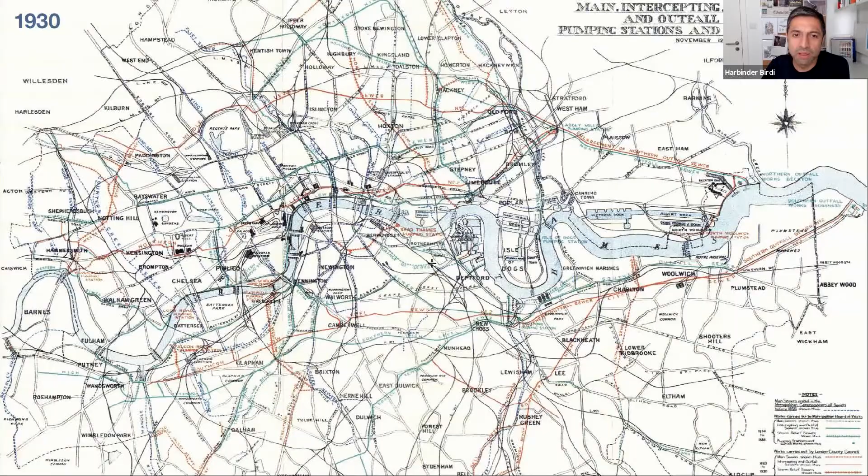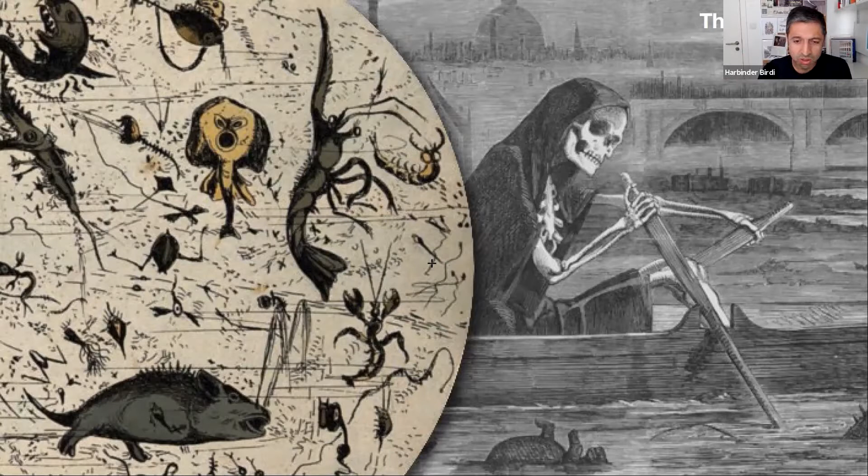But in 1858 there was a big stink, and that's when the River Thames was so polluted because all the sewage was pouring into there that the ministers in the House of Parliament, when they'd open their windows, the stench was so bad that they actually commissioned Bazalgette to undertake the project.

This is Bazalgette, on one of his sites, and he designed the network, which originally had a population of I think 1 million, and he designed it for a population of 2 million, thinking that London's going to expand. The challenge we've got at the moment is London has a population of 8 million, but we're still using a system that is designed for 2 million.

And he did develop a series of profiles of tunnel sections that aided the flow of water - that was the first of its kind. And what he did was that he integrated things like the underground with utilities as well as sewage.

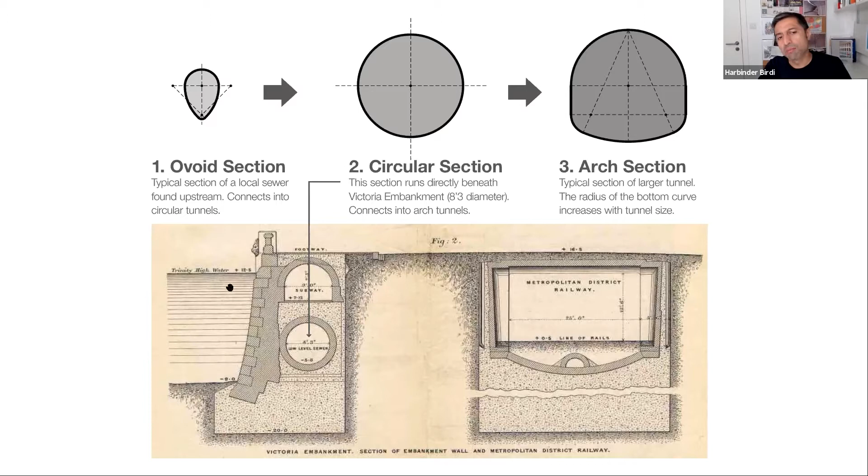And then he reclaimed huge swathes of land from the River Thames and created new walkways - so this is what you see, the embankment. That was quite a heroic project, built over 150 odd years ago.

And so there's a huge amount of sewage in there within the Thames, and the aspiration is basically to find a new system. So the solution is this. I mean, currently at the moment, what you have is surface water, surface, foul, all combined into a sewer system.

So this is like Bazalgette's sewer system. What we're doing now is that we're creating, when this overspills, a new sewer, which is a series of shafts and tunnels which actually take the sewage away. So there'll only be extreme conditions, maybe once or twice a year, when there's extreme rain, that the water will overspill into the River Thames.

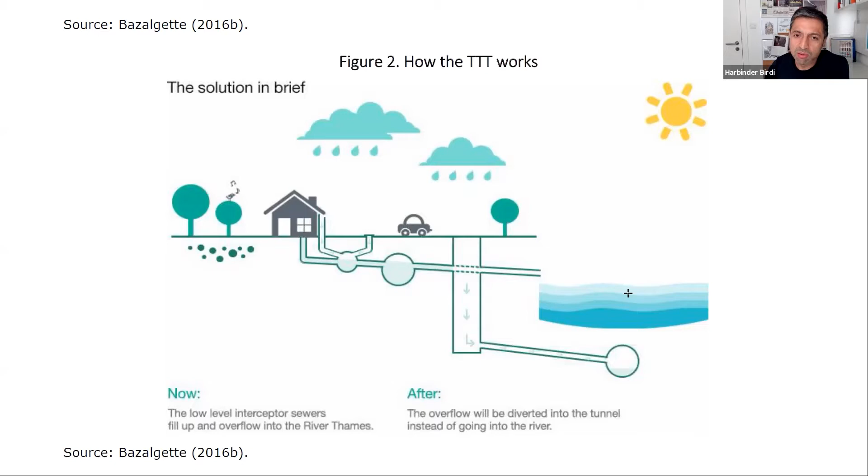So what we're hoping is that the River Thames will become a lot cleaner. And at the moment, it's fair to say that the project is being promoted very much as a big civil engineering project. This project is split into three sections: you have the west, the central, and the east, and we are the architects for the central section.

You can sort of see the mechanics of how it works. I live in West London, so here what we've got is like a 30-meter shaft, and all the existing sewage network, as well as any other surface water, is connected into the new Thames Tideway, and then it comes all the way down to East London, where it's pumped out and treated.

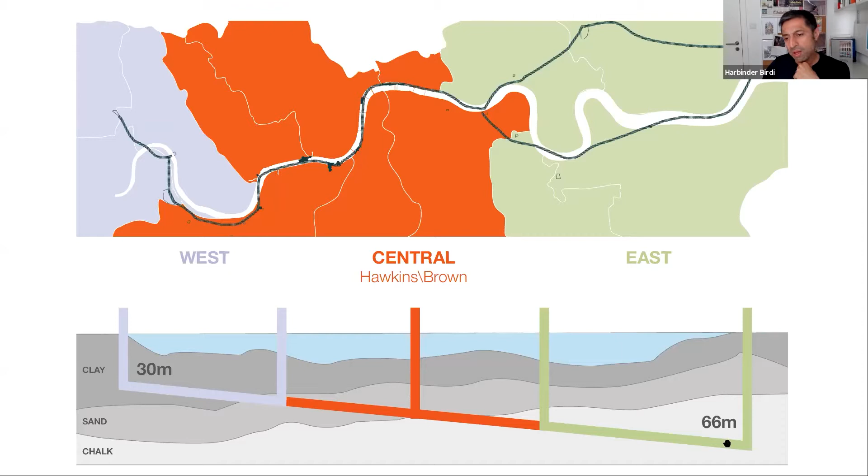And these are some of the images of the work sites. This is actually in Acton in West London, so this is the first shaft. So this is surface water, foul water from all of West London, which then gets poured into this 30-meter diameter shaft. And it's tucked away behind this hoarding.

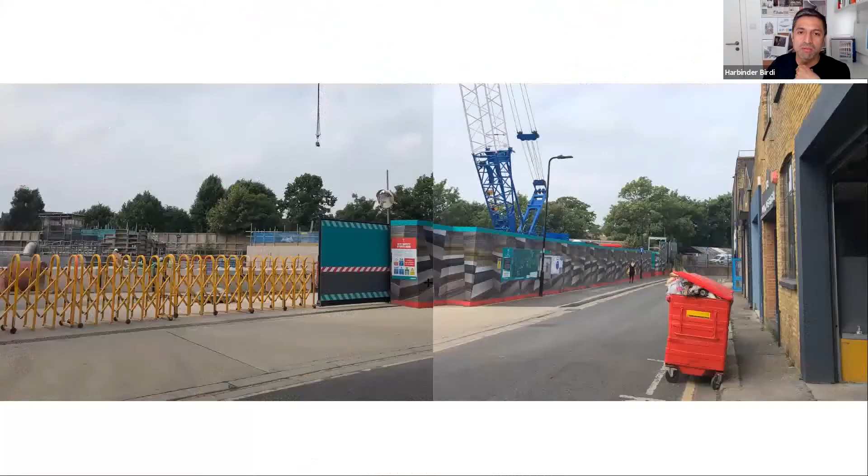So what you'll see along the River Thames is lots of hoarding and work sites that burrow into the ground, and then you've got a big TBM chugging away, creating a 7-meter diameter tunnel. But it's been a great project, one to engage lots of young apprentices, and particularly get more women into the engineering profession, which there's a real shortage of, but also for people to engage with what the river has to offer.

And so for us, we were commissioned - there was a concept design that was developed by Tideway and their team, and what we were asked to do is develop those designs, take them to the local authority as well as present them to CABE, and then develop the details for construction.

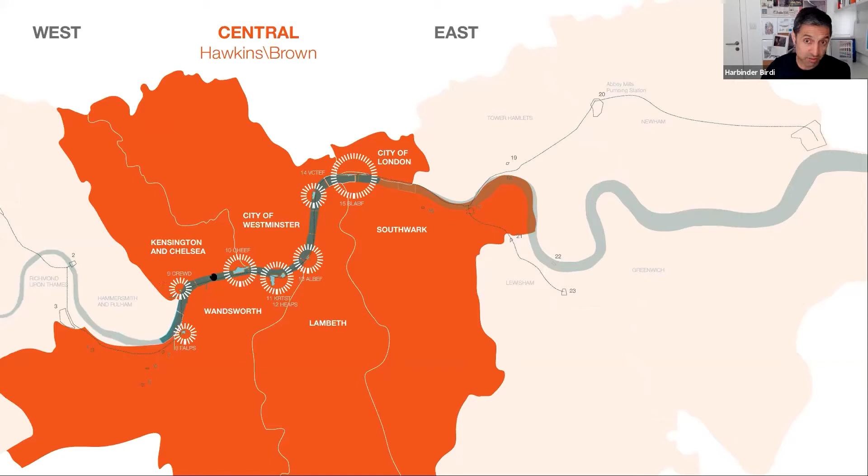So what we have is 5 different London boroughs, but we have like 7 different sites within there, 5 of which are actually on the River Thames. But on projects like this, what you're having to do is engage with a whole raft of stakeholders - so you have the City of London, the Port of London Authority, etc. It's a real combined collaborative effort where you need to get all parties on board.

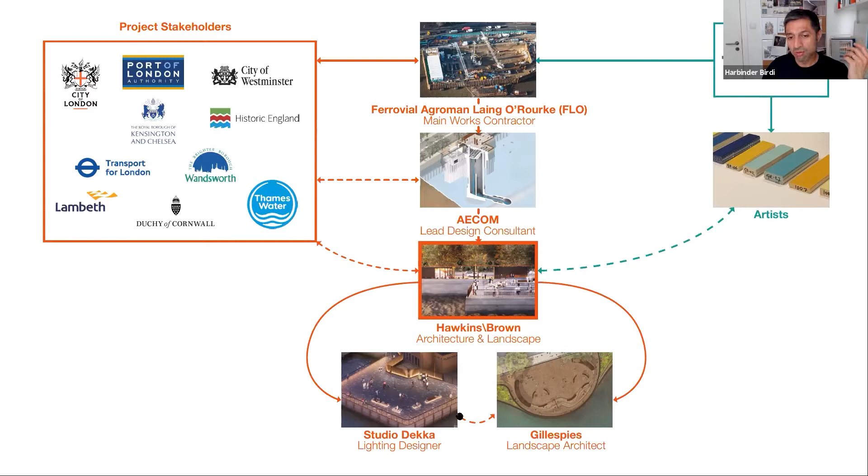For us, the contractor is Ferrovial Laing O'Rourke, AECOM are the lead consultant, we're the architect, and then we have sub-consultants Studio Dekka for the lighting and Gillespies. And then we also work with artists, which I'll mention later. But just the sheer amount of public realm that we're creating in the River Thames is almost the size of Trafalgar Square just on the central section sites.

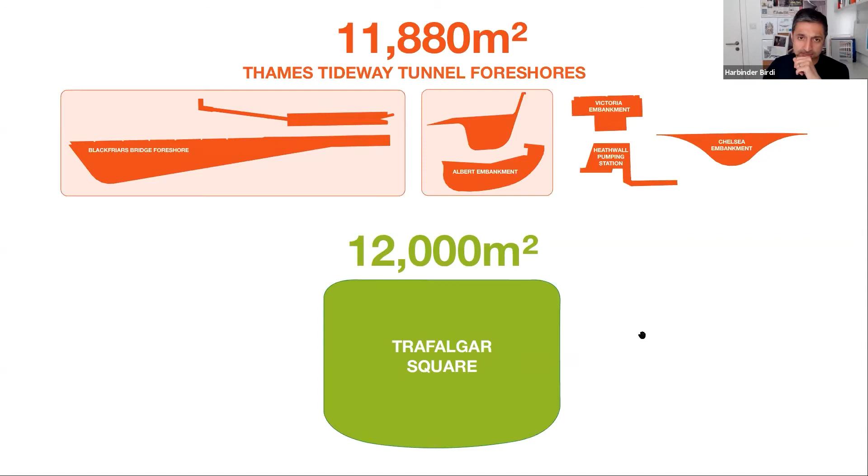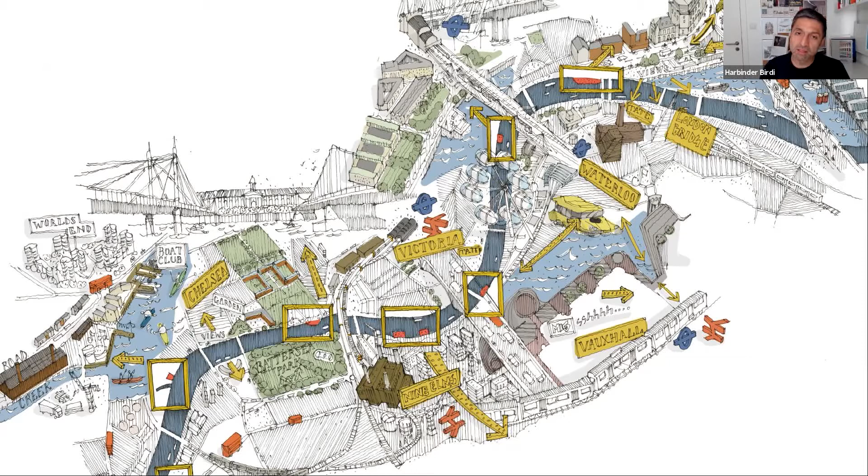So the first thing that we did is we actually looked - I mean, London's considered like a patchwork of villages, all with their own identity and history. One of the things that Tideway asked us to do was look at the history of the sites, and maybe the public realm we're designing could reflect or tell a story about that history. So we started looking at the various places, and the first one is Victoria Embankment.

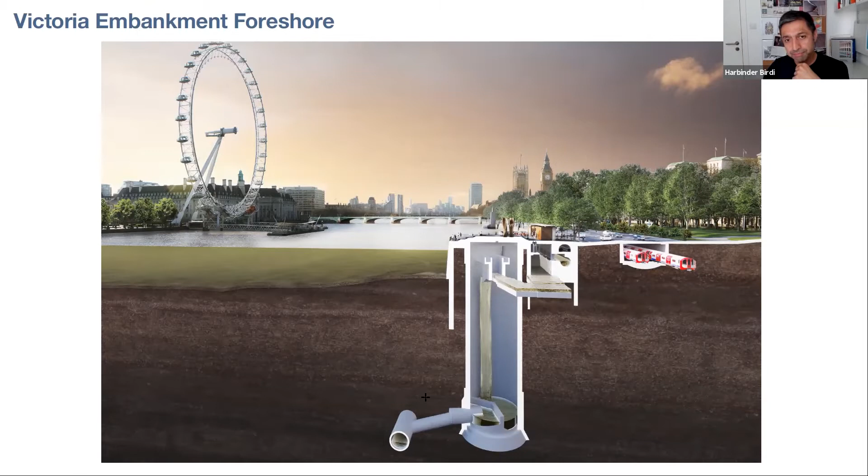Essentially, the project is a piece of machinery that needs to be accessed at all times. So for us as designers, the real challenge was how do you create a fantastic public realm that is open to the public at all times, but at the same time needs to be maintained. So it's very much about civil engineering, mechanical engineering, architecture, and landscape all working together.

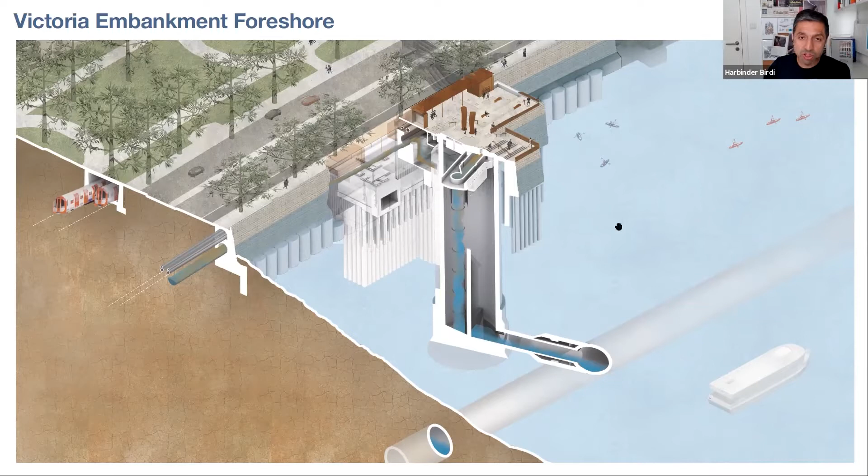You never see the machinery underneath. This is a close-up, because obviously what they can't do is allow for the mechanics below this to fail. So the priority is very much to be able to service that area.

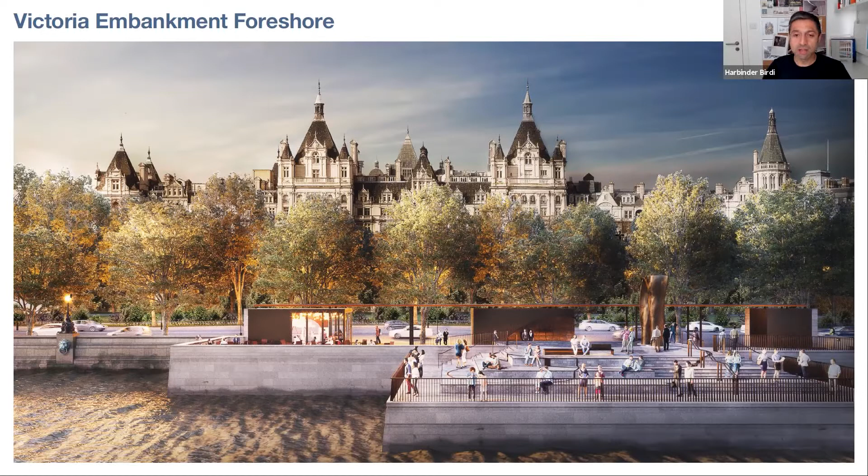This is a view of the embankment public realm from the south bank looking north. What we've done there is actually create a series of pavilions. One's a cafe, on the left with a canopy, and then you have a series of granite terraces that take you down to the River Thames.

We were very keen to tell the story of Bazalgette, because this was essentially where the Bazalgette monuments were. What we really wanted to do was tell a story of the profiles and the sections and the size of the infrastructure that Bazalgette designed 150 years ago.

So what we did is etch those profiles onto the side of the bronze cladding that will clad some of these kiosks. Behind there are actually operational materials and toilets and cafes and kiosks.

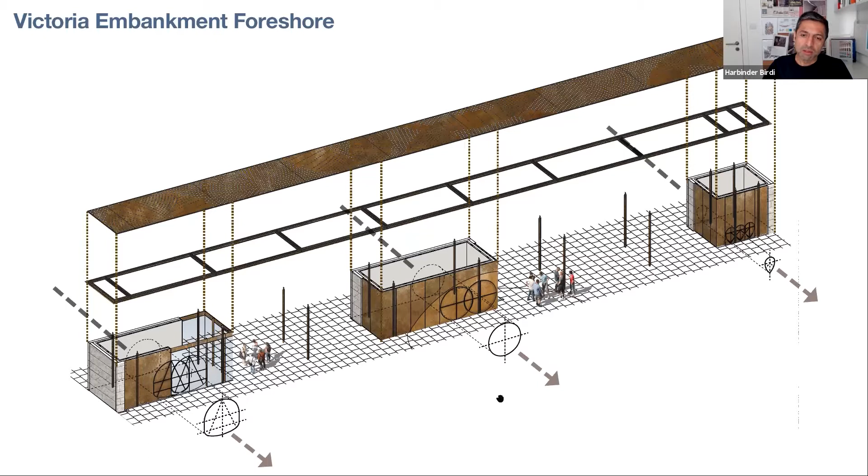Overlaid on that, we wanted to show the scale of the engineering that we are designing now to service London. So that's a 13-meter diameter shaft, bronze inset within the granite, as well as a 7-meter diameter tunnel.

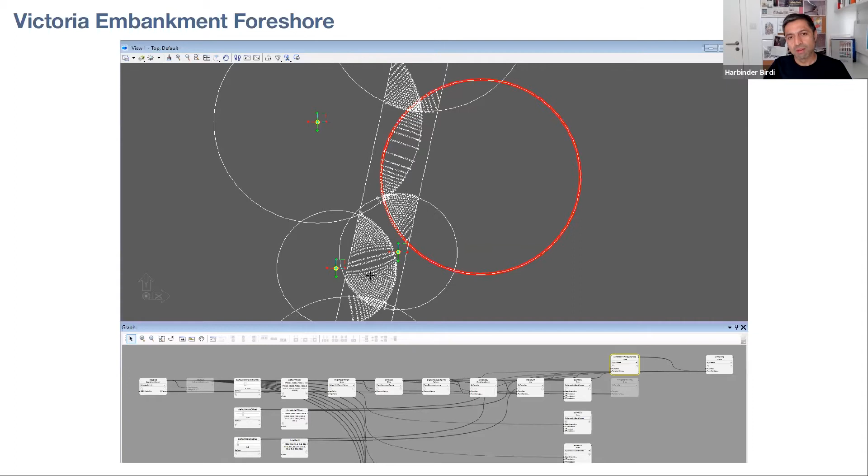Then we actually overlaid some of those geometries onto our canopy and created a frit. So what happens is you've got those different sections creating and animating a canopy, which is then used by the public.

This public realm is free access to all. It's a continuation of the pavement. But you end up having, I suppose, profiles and frits that are set within the landscape that tell you that story in terms of the infrastructure that lies beneath your feet.

These structures here are actually ventilation shafts, and you might see them in London, the Victorian ones. They're vents, and that form is actually the profile of the vortex of that 30-meter shaft. When sewage falls down there, it's designed to allow the sewage to fall in the vortex so that it doesn't land on the concrete and impact it and break it.

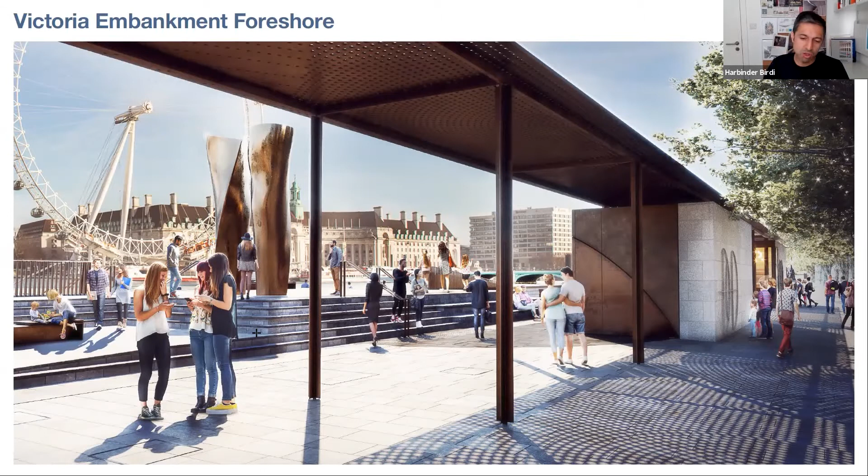And that's the form. Within those chimneys, we have this carbon mesh which absorbs all the foul smells, and they are located on each of the sites.

This is a view from the embankment, and you can see here where we've got the Portland stone and the granite. What we're doing is etching onto there the profiles of Bazalgette sewers that are literally beneath your feet there.

This will be open to the public 24/7. You can imagine, like New Year's Eve, this will be the great vantage point when the fireworks are going off on the Millennium Eye. So very much public realm.

What we really wanted to do with our lighting was make the area towards the street well lit, but as you go to the river, the lighting fades away. So essentially there is no light pollution at the river. We worked very closely with the Illuminated River team, who are illuminating all the bridges on the River Thames.

This is the site, a picture taken about a year and a half ago. You can see the heroic engineering where you've got a very large site, the River Thames. It's double tidal, actually an estuary rather than a river. You're having to create this huge piece of infrastructure surrounded by a real hostile environment.

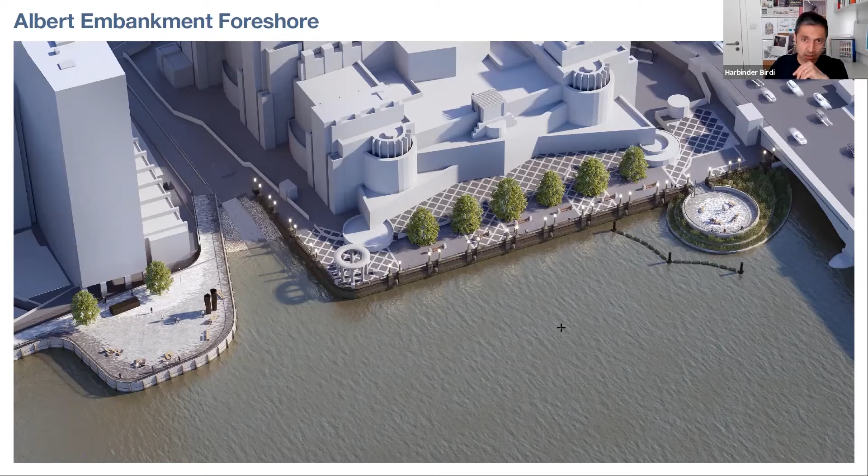This is another site, Albert Embankment Foreshore. That's the MI6 building. What we were doing there was creating two sites, here and here. Underneath these sites is all this infrastructure here.

Sometimes what happens is this is the old River Effra. The River Effra used to be the river that naturally fed into the River Thames. It then became part of Bazalgette's sewage network, and this area here is an overspill.

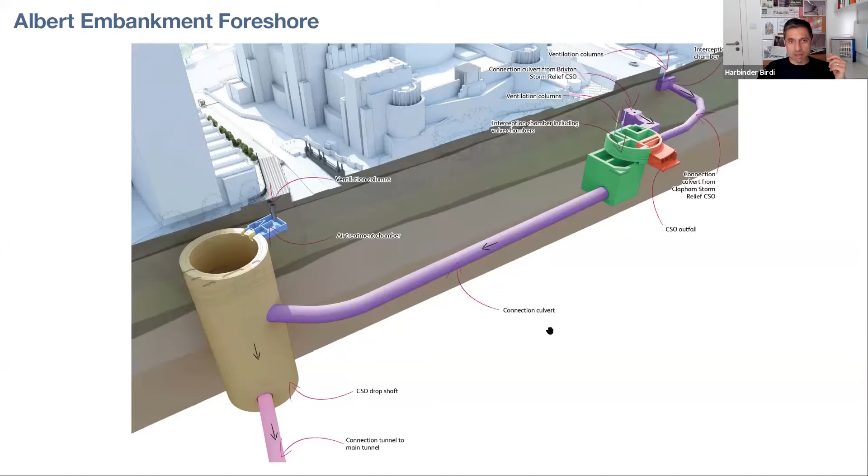So we're connecting the overspill into a series of chambers, which then gets drained away through a culvert into a shaft and into the main tunnel. And this is the River Effra. So this is part of Bazalgette's intervention, and this is a little gate which allows for the overspill into the Thames.

This was the brickwork that the Victorian engineers and bricklayers created. It's still immaculate, still working really, really well. So we're not taking any of this away. None of it is now redundant - it's still working really hard and will be for the next 100 years.

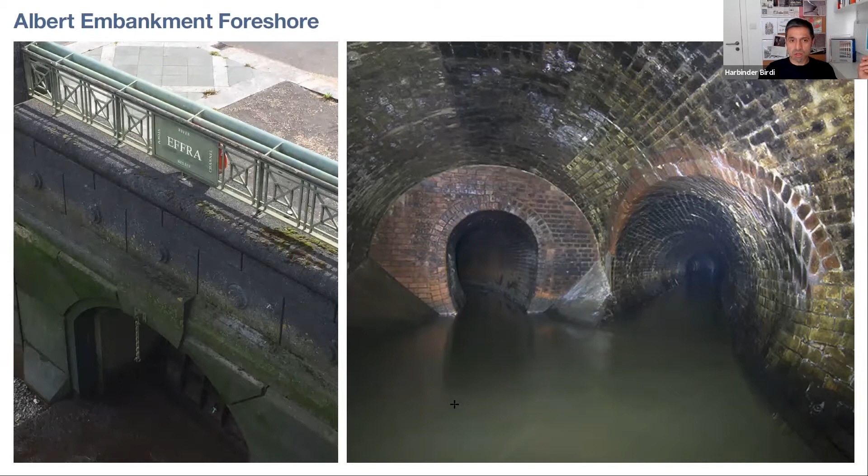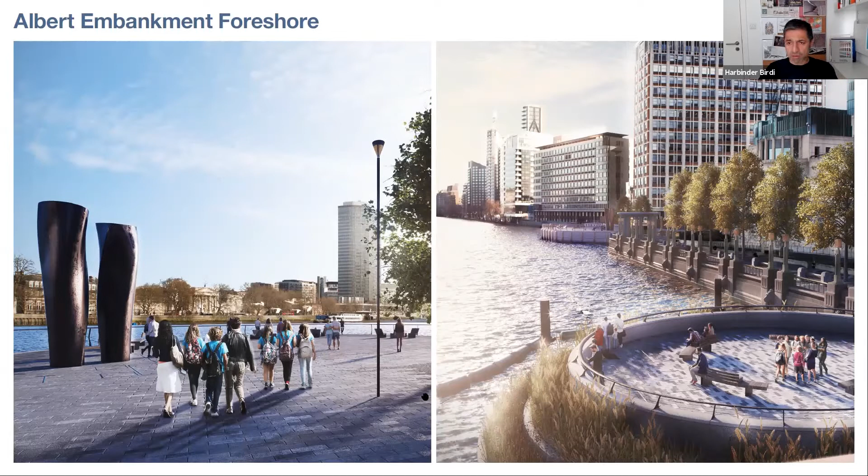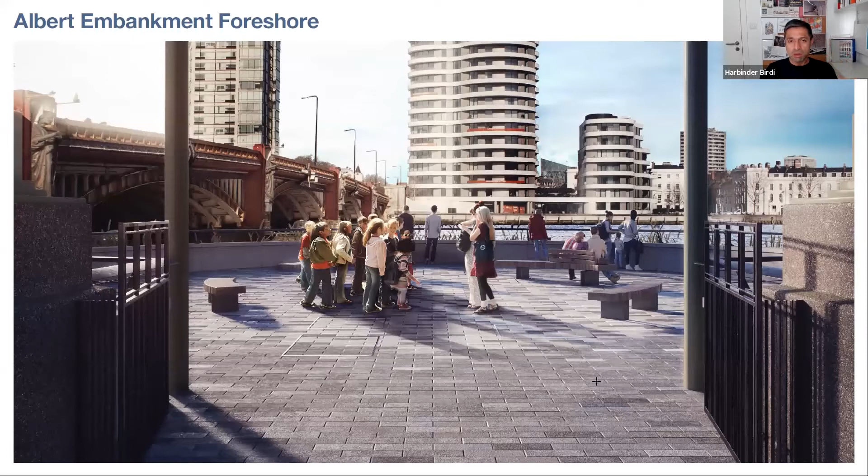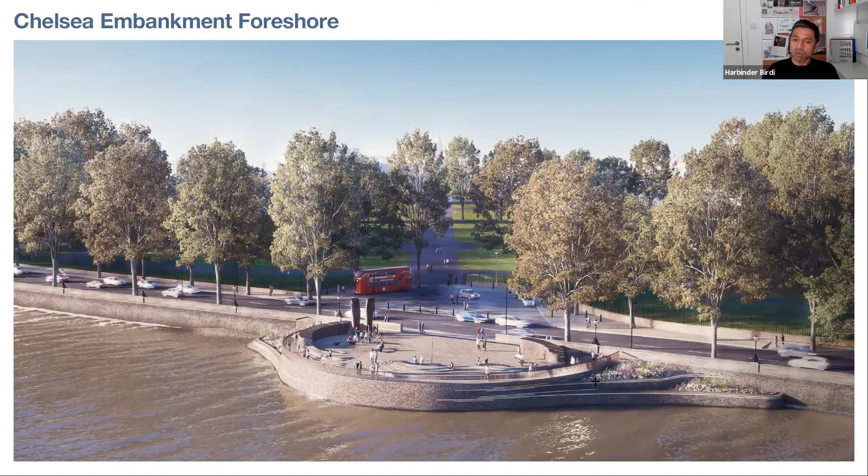Another site was the Chelsea Embankment, where you have the Chelsea Flower Show. There, Bazalgette actually used brick for the wall rather than granite. What we wanted to do was develop a proposal which was almost extracting the brick out into the river, so it would look as though the public realm has been eroded by the river over time.

We worked with a lot of natural contours, but we were very keen to bring in tidal terraces - bringing in vegetation that thrives off the river.

We were also looking at the flood defenses - we were designing this structure up to flood levels of 2065, 2090. So we were mindful of the interventions we were creating, making sure there isn't a breach in terms of anticipated river levels due to global warming.

We worked closely with the landscape architects on the specification of some of these materials. We were very keen to try and get as much greenery in as possible, but the challenge there was you've got a big piece of hard landscape with a lot of kit underneath, so actually putting plants in there is a real challenge.

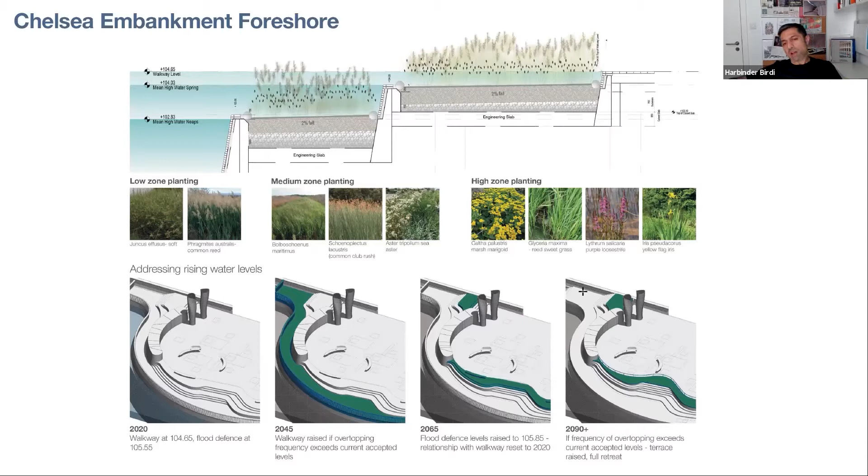What Tideway did do is that wherever they had to remove trees or vegetation from one of the sites, they relocated it elsewhere. So it was effectively offset.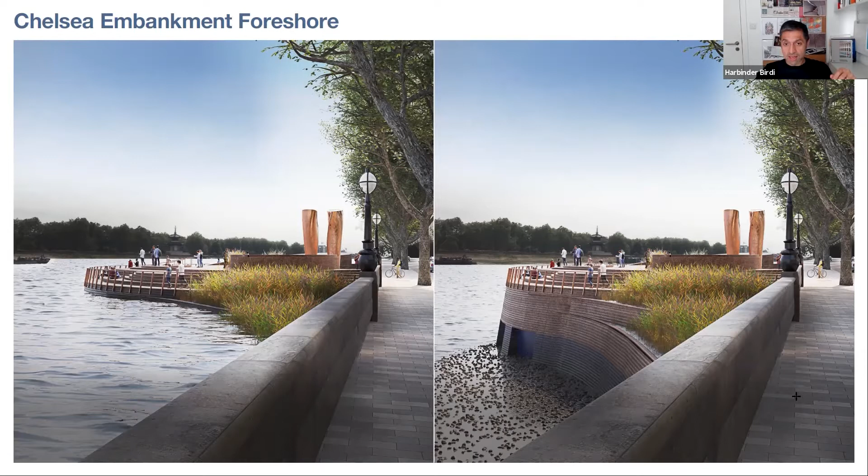You can see here the tidal drop and what that public realm looks like. At one point you are very, very close to the river here, but you always have those great tidal terraces there, which are in full bloom. Those areas just there are actually the gates, should there need to be a discharge into the river.

Very much a team effort. The big challenge on big infrastructure projects is working together in a big team, and actually making sure the data and drawings you need are all combined. We actually delivered this using Bentley ProjectWise.

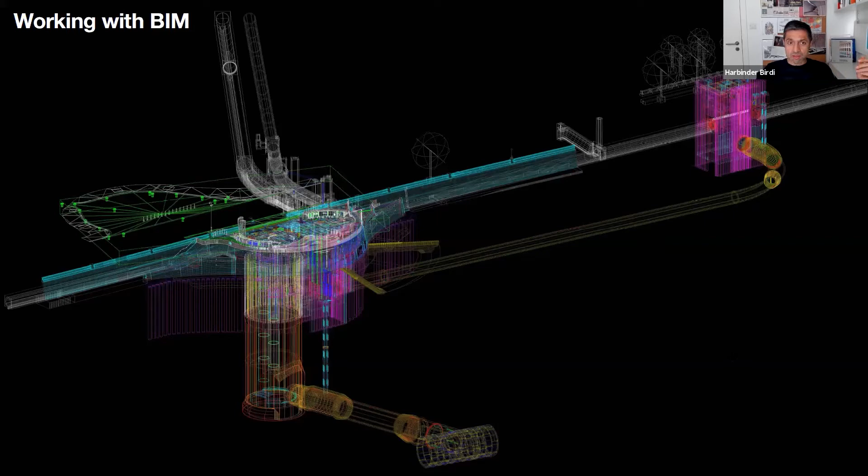For each site, there's a team of 40, 50 designers working on the project. One of the things we did was a survey of the existing Victorian wall, Bazalgette's wall, and then we put into that the civil engineering model, followed by the marine engineering model - you've got piles there that protect the infrastructure from the harsh elements of the river.

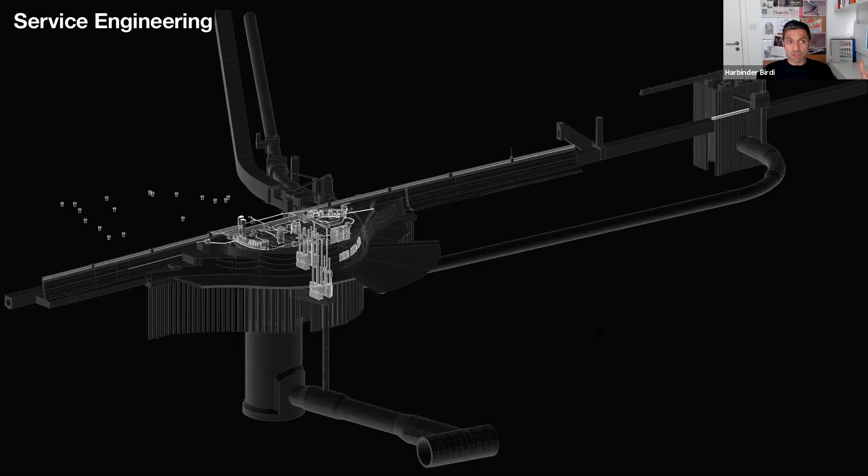And then you've got the service engineering - very much the mechanics, the MEP. Overlaid on that, we've got the architecture and landscape. This was done for the whole project - something like 15, 16 sites along the whole river.

When it all comes together, we've got a live BIM working model. For us, this is like a plan - you can see all those inspection chambers and manholes. They need to be accessed 24/7.

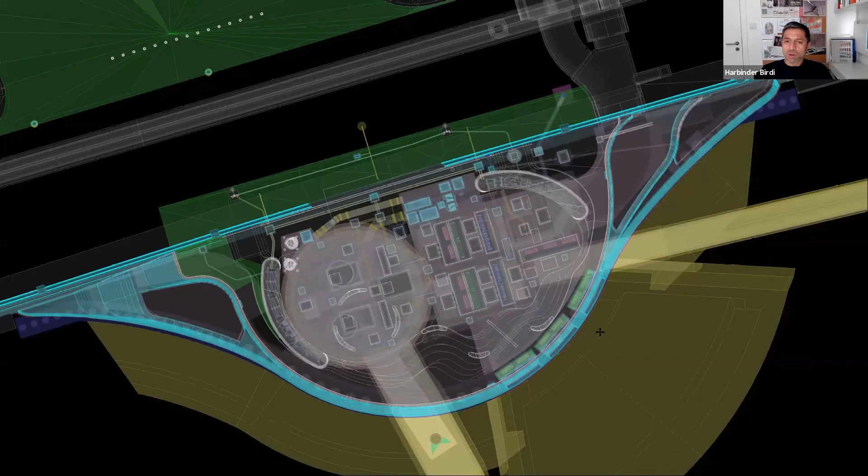For us it's like, what material do we use that almost doesn't look as though all of that mechanics is beneath your feet? And we decided to use brick in continuation of Bazalgette's work, so we have these brick insets within the manhole covers.

So very much it's about making sure that detail is considered, especially as this public realm is going to be accessible to all.

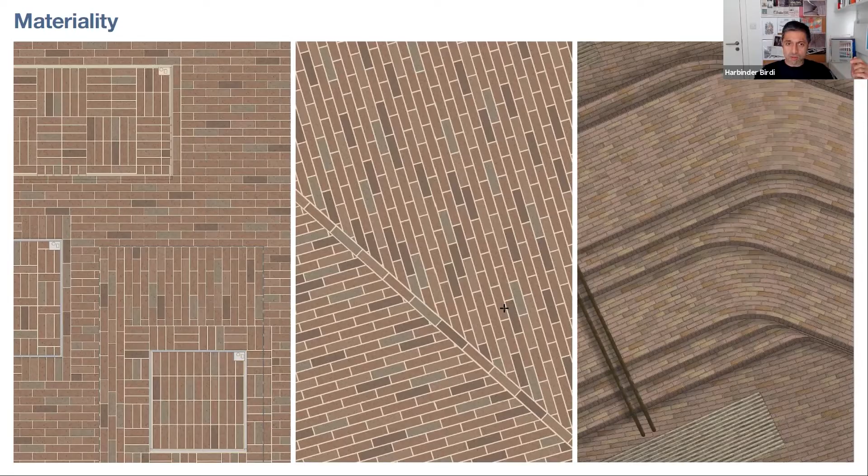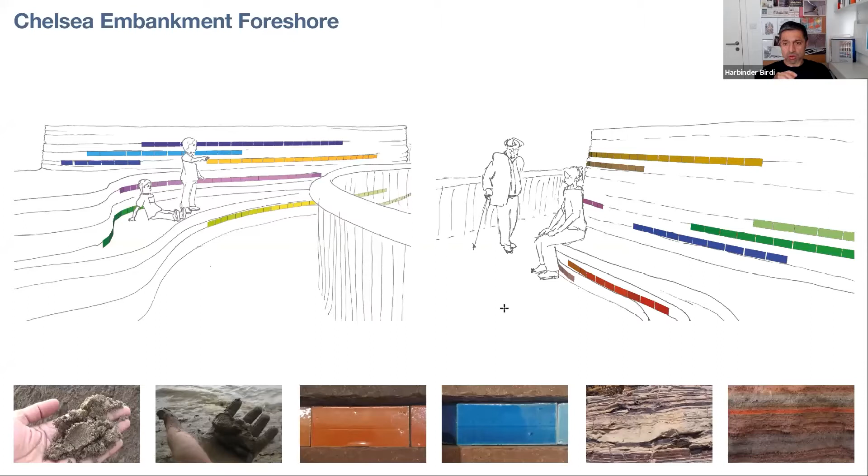One of the things we did is integrate work with several artists, including Florian, who's working with us on the Chelsea site. There, he's working with a series of glazed bricks that we're interlacing into the brick envelope. It's almost like a strata within the ground, which he wanted to reveal using brick slips. This involved selecting a series of palettes of colors and glazed bricks, and these will reveal themselves throughout the day depending on how the light falls on them.

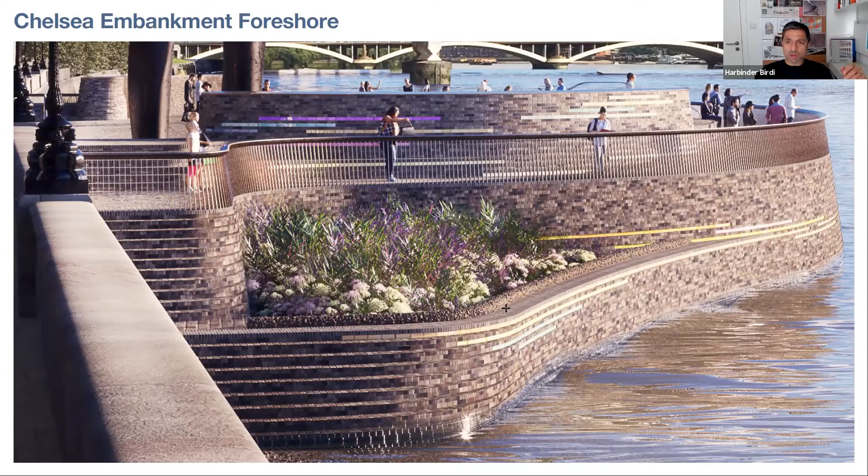It's a very subtle intervention, but you can really engage with them both on the riverfront and on the public realm.

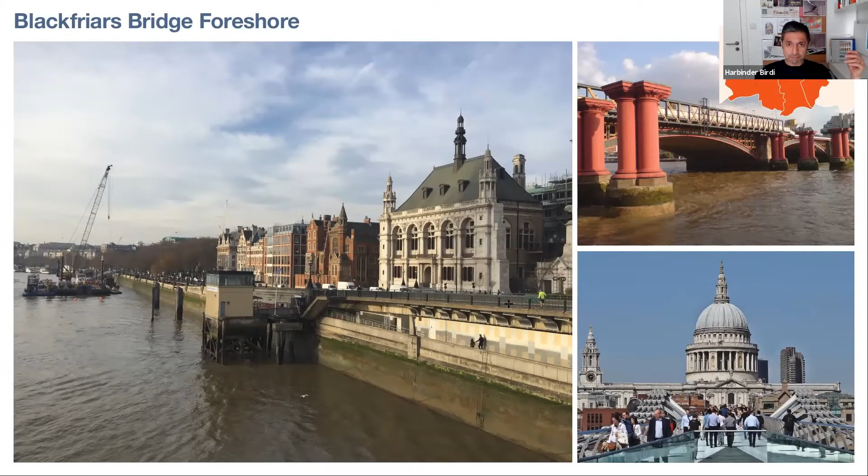At Blackfriars, this is one of the large sites, very much in the City of London. We're creating a huge public realm there, which was a real interesting challenge - when you've got a large public realm, how do you break it up?

We were keen to create areas where you could integrate vegetation - quiet spaces here, larger public spaces here, a cafe kiosk, and terraces for you to enjoy the river. Generally what happens is there's a continuation of the river walks. People jog along the river, find themselves along here, and continue along the embankment all the way down to Victoria.

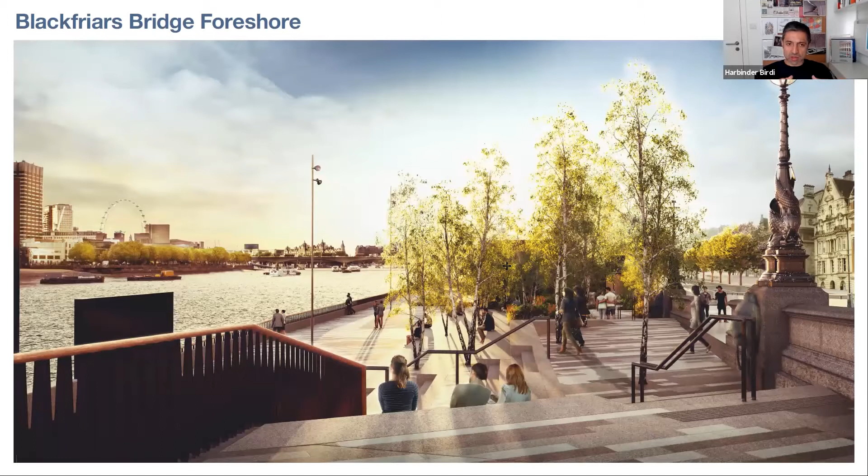For us, this was a series of terraces using granite finishes and material finishes, bringing in trees just to break up that space and animate it, while incorporating a lot of the original Bazalgette wall features.

For instance, here, the sturgeons - this was a competition that Bazalgette and his team led 150 years ago in terms of the design. We were very keen to work with a lighting designer, but keeping our lighting a lot more toned down and subtle.

And as you go towards the river, a lot darker. So these are some of the spaces that we're creating.

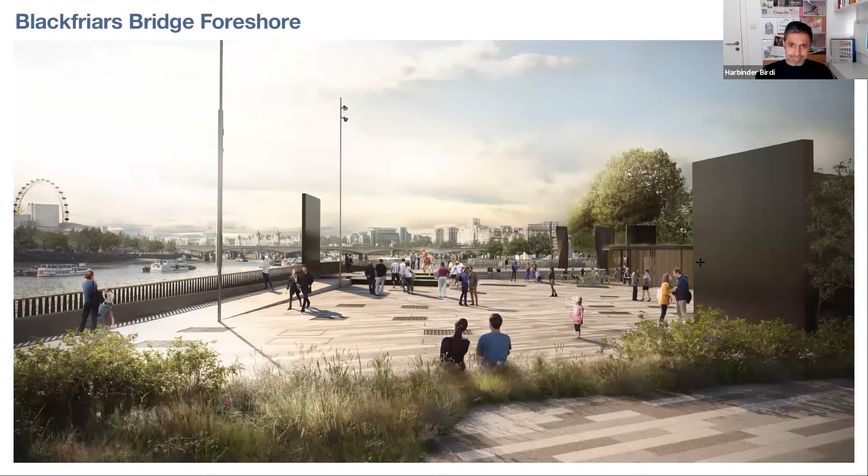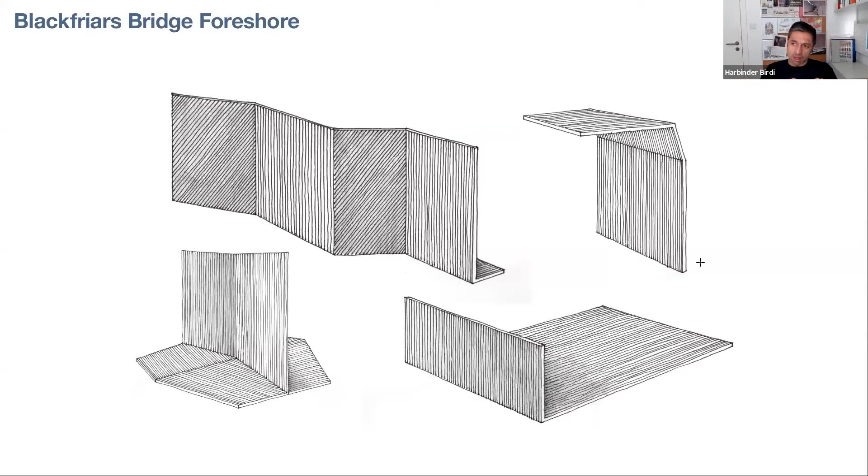We're working with an artist on the Blackfriars site called Nathan Coley, a conceptual artist based in Glasgow. His artwork - they wanted to find what they called stage sets. What they wanted to do was take that really vast vista and find ways of breaking it up to frame the view. These are some of his sketches, and this is one of his models.

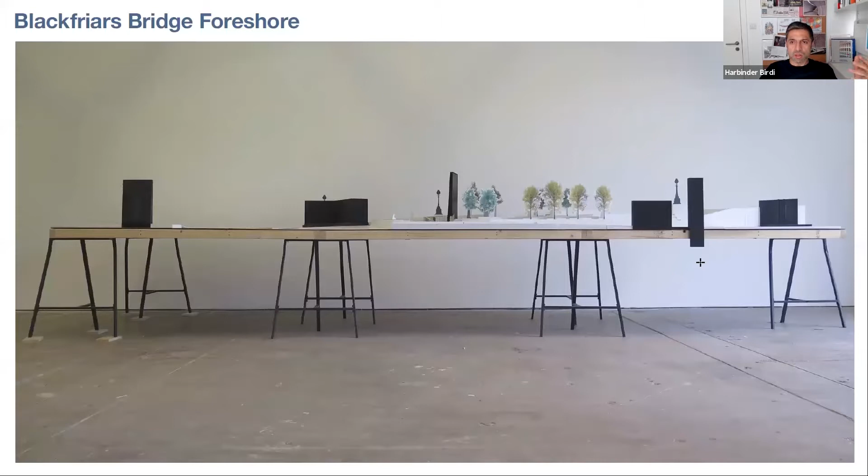What we're doing is carrying a series of monolithic black precast interventions within the landscape, which you can actually engage with - you can sit on them. Some are going to be water features. But what they do is frame the view around.

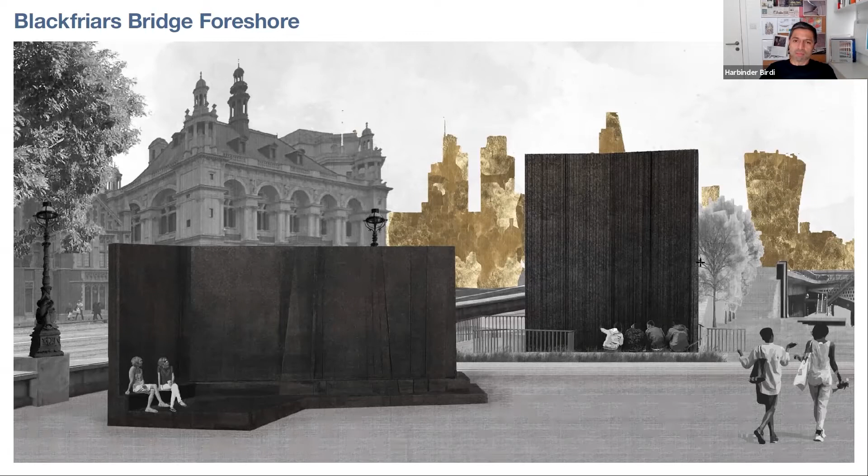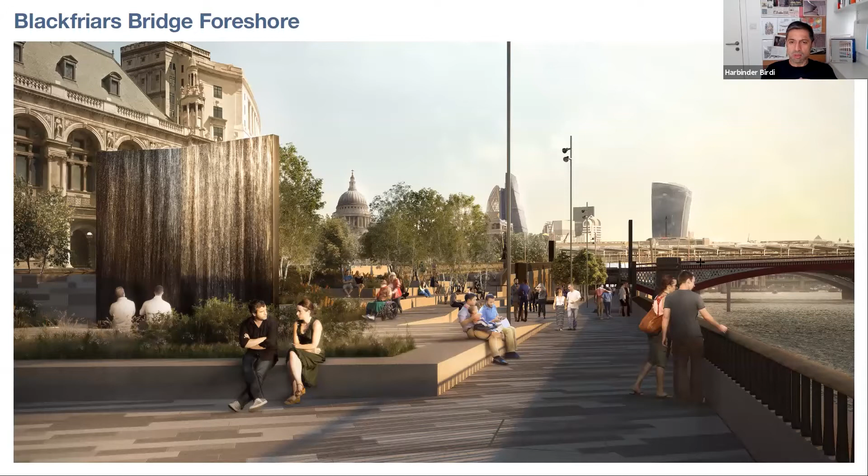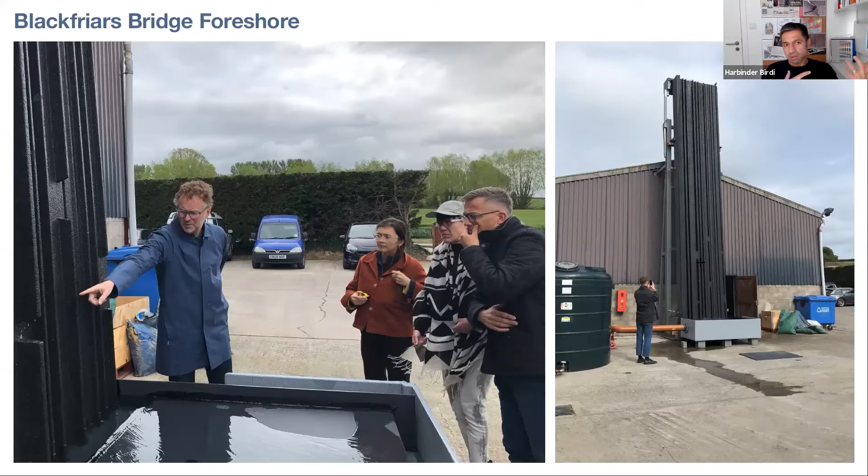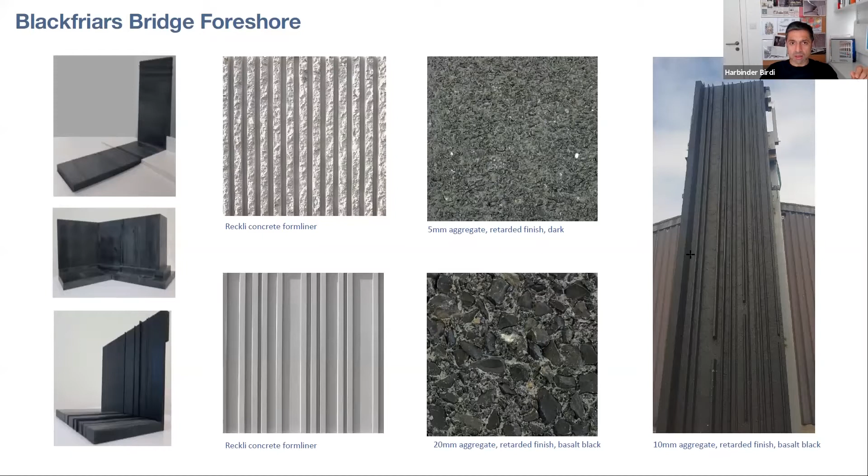So these are very much building elements becoming pieces of art, sculpture incorporated into a civil engineering project. These are some of the finishes we've been modeling and testing, and some of these are currently in fabrication. This is working with a whole raft of them - the engineers have had a really interesting time working with the artists, the architects, the contractors, and also the specialists, Techrete, who are creating these interventions fixed into the landscape.

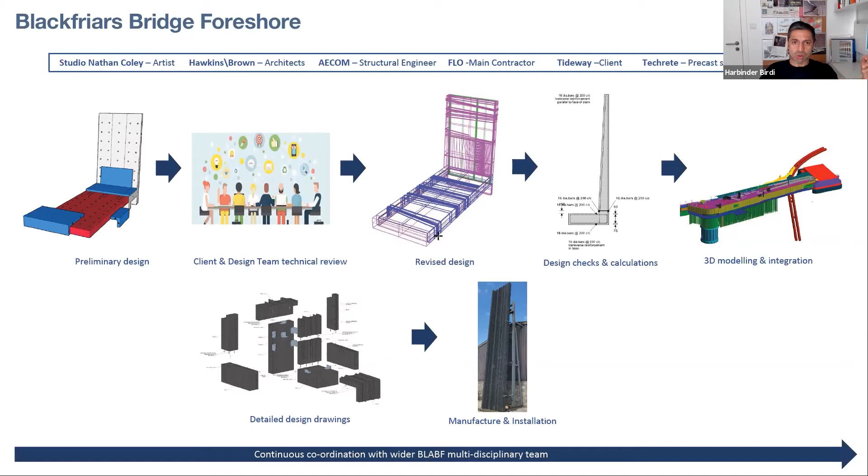They're very much part of the sort of civil engineering. It's almost seamless in terms of the interface between the art, the architecture, and the civil engineering.

So what we envisage is that this space is going to be used more and more, not just by people from the South Bank, but also as a destination for people from the City of London.

That's what's been a really interesting journey for us, really, looking at how you can design space to respond to different people's needs.